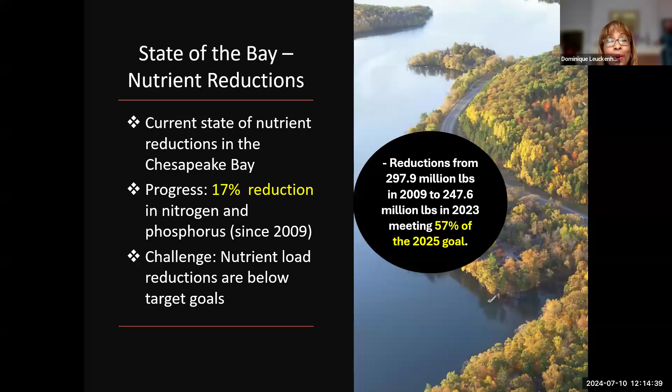And let's be reminded, 2025, well, we're almost halfway there. So we've got to look at these kinds of next generation approaches, such as what we're talking about, the use of biochar in order to improve the health. And it really amounts to healthy soil.

As indicated, we've had a lot of erosion, sedimentation with the increased intense storms. If you've got poor soil health, and we have poor soil health everywhere, in our ag lands, in our urban lands, we've essentially in ag applied lots of chemicals, and we've moved towards big outcomes in terms of product. We've destroyed the soil. And that's why, as I'm going to mention later on, USDA NRCS is now paying farmers to add that carbon back to the soil through compost, but also through biochar.

So as we look at the volumetric impacts, which are exacerbated now, USGS did a study a number of years ago and modeled to determine the impact of low impact development or green infrastructure and how it can improve performance and reduce the volumetrics, and found that it could significantly reduce those volumetrics, so this would be decentralized distributed green infrastructure versus centralized gray infrastructure, and that it would have a significant improvement.

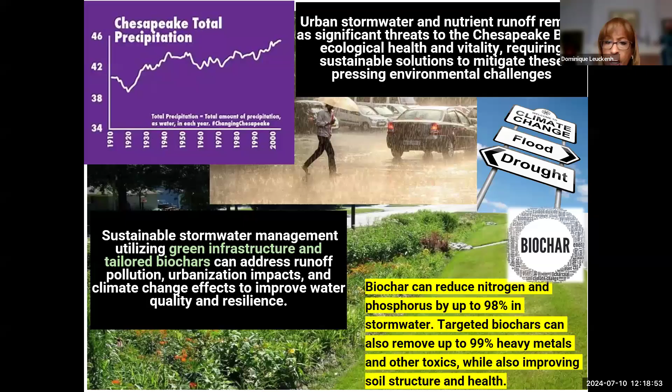Biochar has been found, and when I say biochar, I'm going to talk about a broad category of chars, because different chars, based on the biomass source, are better to treat different types of pollutants. But as a class, we've seen the ability to reduce nitrogen and phosphorus by up to 98% or so in stormwater, and heavy metals similarly, 99% or so, and also PFAS in work that I'm currently doing with Stevens Institute of Technology. In addition, with the benefits of using biochar, we're seeing opportunities for credits and subsidies. So investment in biochar can mean money back.

USDA has a code 336. It's a soil carbon amendment. They're now actually providing financial assistance, as they call it, for putting carbon back into the soil. Typically 60% biochar, 40% compost in 2023. And this is an average, because it really varies state to state. I believe at this point, just about all of the states have adopted 336, but not all of the states have implemented 336. And roughly $160 per cubic yard is reimbursed back to the farmer.

This can be used on farmlands or forested lands. So there's money back, and that carbon is helping to regenerate the viability of that soil. And also the carbon increases the soil's ability to hold water. So in a drought, very important, but later on you'll see that water also helps with denitrification and bioretention.

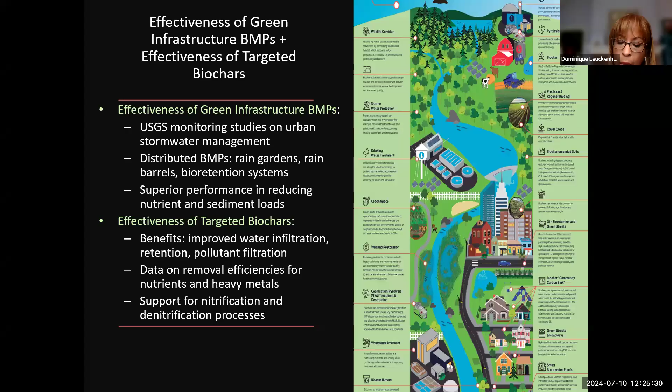So this is just a summary of some of the things that I've mentioned before, and I'll get into the improvements in terms of infiltration and pollutant treatment, removal efficiencies, including those for nutrients and heavy metals, and of course nitrification and denitrification processes, which is where biochar helps enhance microbial activity to do the job. So here's a review of some of the things I've said. I'm not going to spend a whole lot of time on this slide, but it gives you an idea of the types of functions of biochar and why it works.

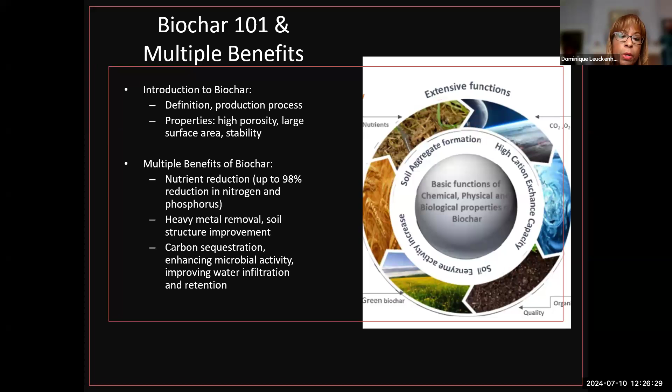So there's a physical aspect to it, a chemical aspect, and of course biological. Physical: surface area, high porosity. Chemical: cationic exchange capacity. They're mostly anionic, meaning they have a negative charge. They can be functionalized to change those charges in order to treat certain pollutants. But for example, that negative charge is what makes them so great for heavy metal removal. And the porosity is also what helps with microbial populations, so you'll get biofilm development, and with those microbial populations comes nitrification.

You can actually reduce ammonia, and then of course denitrification, as you can create anoxic, anaerobic conditions down in these biofilters, meaning lack of oxygen. Certain microbial populations that are denitrifiers can treat that. This is just a summary. For example, pH matters. A lot of science is important in this. And if I'm talking past some of you with the anaerobic and aerobic, pardon me, but it's to give you an idea that, as we look at nature-based approaches, chars can actually help enhance nature's ability to treat many of these pollutants.

And if you really think about it, over history we've essentially used soil and water to dispose of pollutants. And we came to believe dilution is the solution to pollution. Well, now we've got water bodies like the Passaic and Hackensack Rivers near our property in Newark. Both are Superfund sites now. Same thing with our soils, because the carbon and organic matter has been eroded, and while we're adding carbon back, we found we get attached pollutants to that. Biochar can help to return and regenerate those resources.

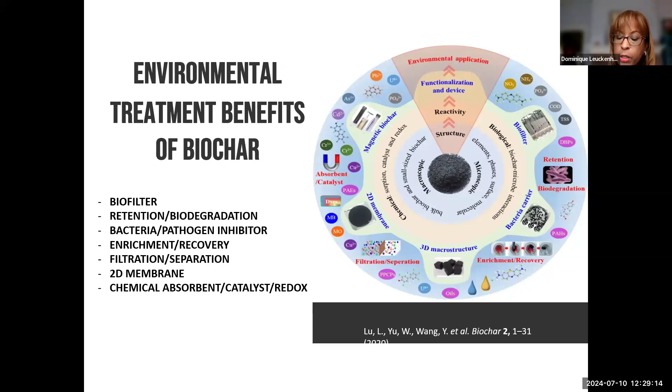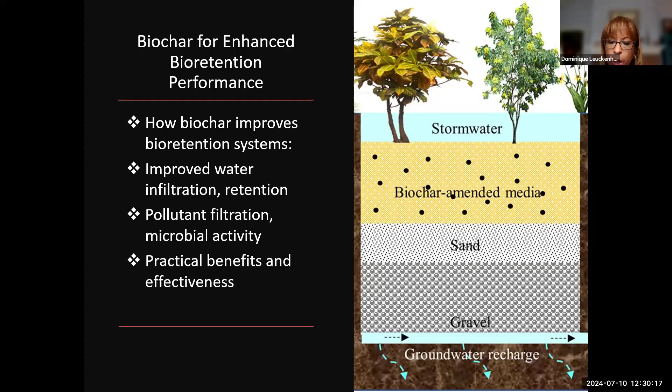The vegetation we know is important for the treatment, but typical bioretention systems have not been found to treat dissolved pollutants, which is very important in terms of really being able to improve that water quality, whereas the addition of biochars is helping to address and treat those dissolved pollutants and enhance that contaminant removal. The char serves as a carbon source as well for the microbes to do that.

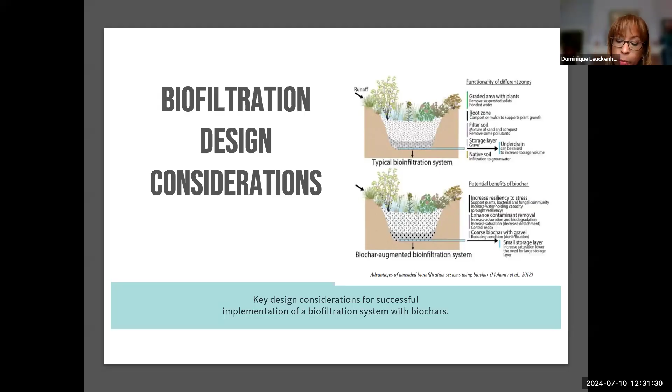In fact, biochars have been compared to granular activated carbon, which has been the treatment of choice for toxics. But granular activated carbon is made from bituminous coal or coconut at high temperature, not climate friendly, and expensive. I'm going to call the biochars sort of the greener activated carbons. And what's great about it is we're taking waste biomass and turning it into a beneficial reuse. Big deal, because waste is a big problem, and we have a lot of sources of that biomass.

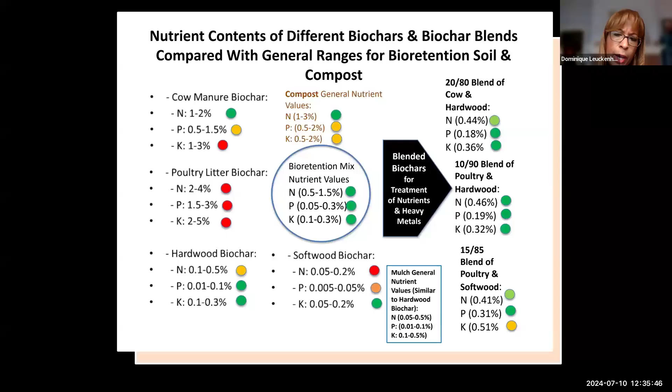You can also think about this if you're looking at trying to bring back healthy soil, for example, in a riparian corridor. But I think what I'm interested in is, how can we treat heavy metals and nutrients through these blends? And that's what we've been experimenting with.

Here's an idea of surface area. Wood chars tend to have higher surface area than manure chars. Pardon me, I'm going to call them chars. Porosity, the manure chars tend to have, interesting, it depends on the char, but if you compare the porosity, they're very similar. And of course, it also depends on the source material, both for wood and manure chars.

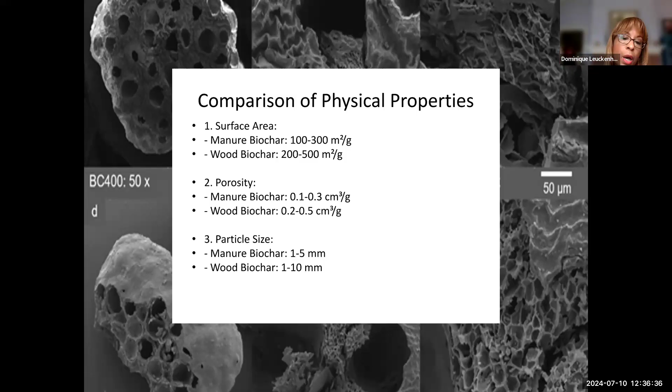Some manure chars have large pores, not as many in quantity, but in size, which is what you don't see here. Particle size, you can see wood char 1 to 10, 1 to 5. So it's just to give you an idea, comparing them.

pH levels, the manure chars tend to be higher in pH, which is why it tends to also make them better for treating, for example, lead and heavy metals. We've tended to add, for acid type soils, acid mine drainage, for example, we've tended to use lime to raise that pH. In this case, you can use a poultry char in that soil, not in the water, but in the soil, for example.

Cation exchange capacity, because manure chars, if you think about it, the source of those manures and what that animal ate, you may have more minerals. So that CEC tends to go up, which means they have a stronger binding capacity, particularly if you're trying to treat something cationic.

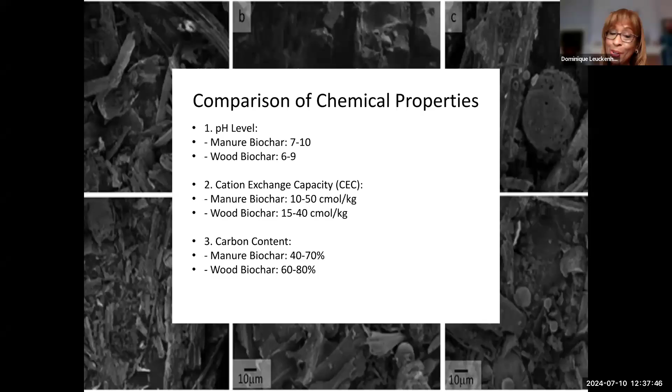And then carbon content, wood chars tend to have a greater percentage of carbon than manure chars. But again, this is very general, you really got to look at those individual chars, and that's why the science and the data is important. Water holding capacity, very similar. Again, it's the larger pores that help the manure chars. And then of course, large surface area and lower moisture content starting with wood biochar tends to really increase your water holding capacity.

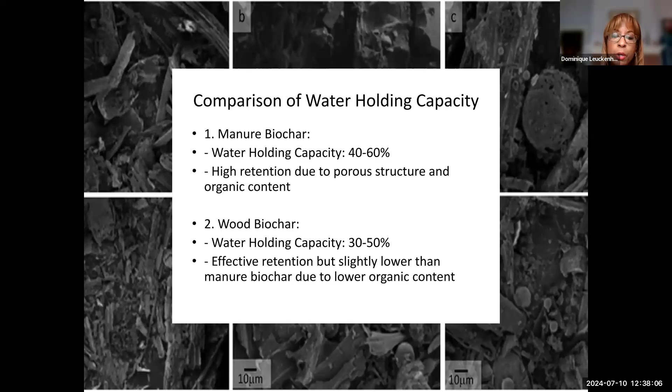So I want to move quickly through some of these studies that are being done using chars to amend green infrastructure bioretention. Shout out to Dr. Imhoff and the University of Delaware, who years ago started working on amending, in this case it was a stormwater pond, but they've done swales, and this is using wood chars, and have been able to reduce total nitrogen. Again, remember this is dissolved, up to 73%, and phosphorus 90%. So very effective, and also improving soil health.

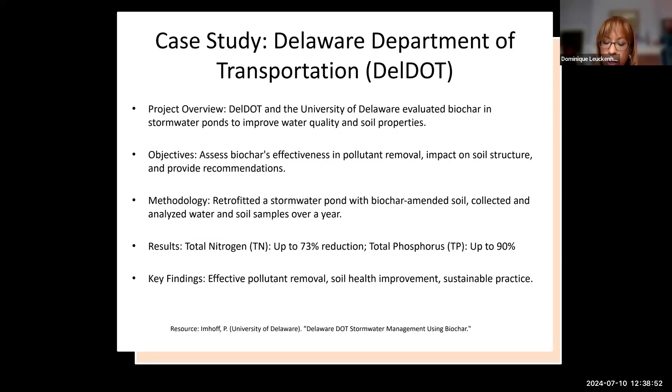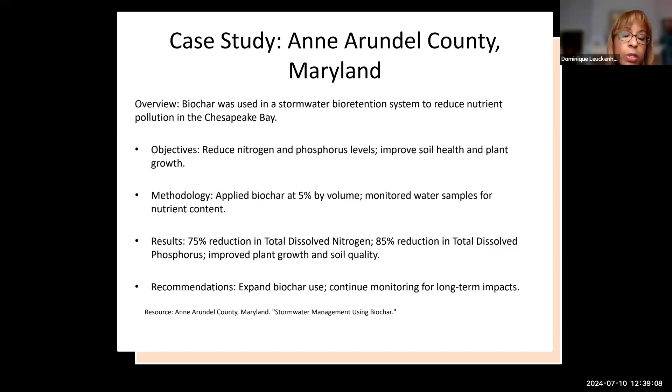Anne Arundel County, and this is roughly 5% char. It's very similar, 75% dissolved nitrogen, 85% phosphorus. Again, continued monitoring to look at the effectiveness. Philadelphia, Green City Clean Waters' use of green infrastructure to address their CSOs and beyond, have also studied the addition of char to bioretention, 5%. So you see very similar numbers. So we're seeing consistency here. Again, these are wood chars, 80% P, 70% N.

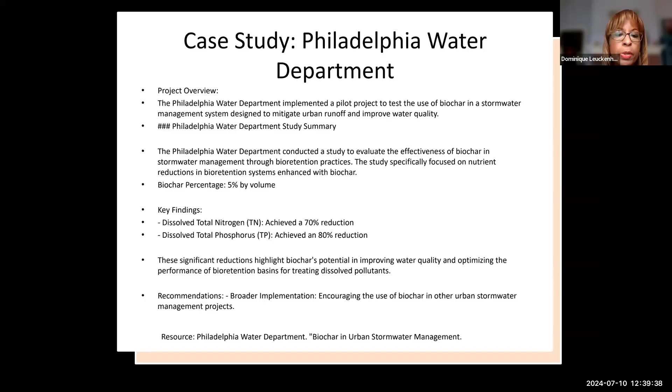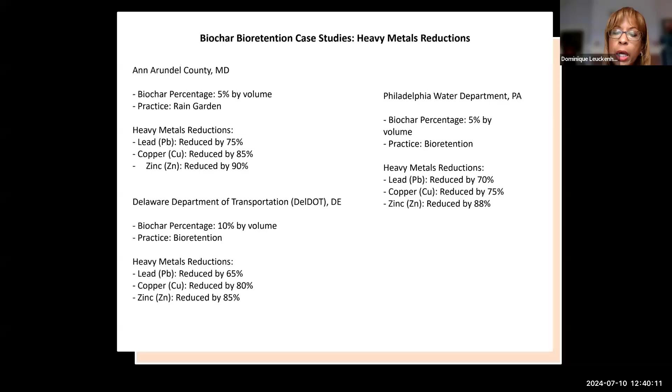And then just a summary of those in terms of what they did with heavy metals, very similar. Anne Arundel rain garden, lead 75%, copper 85%, zinc 90%. DelDOT project, this was 10% char by volume, got 65% reduction of lead, 80% reduction copper, 85% reduction zinc. And Philadelphia, 5%, got 70% reduction lead, 75% copper, 88% zinc.

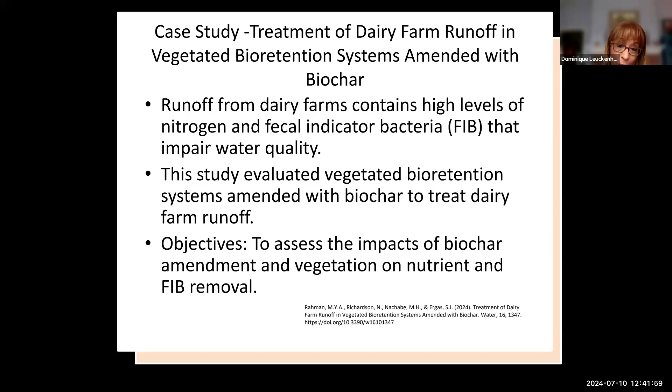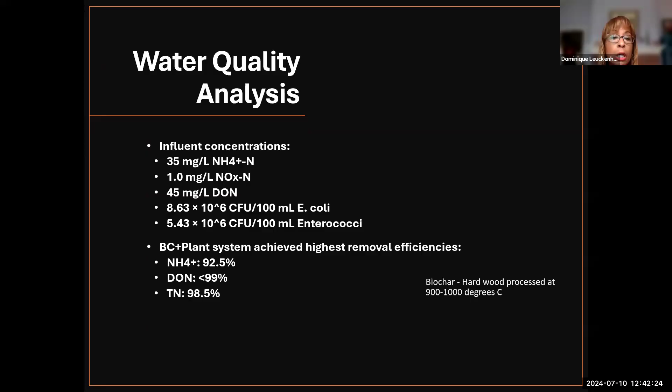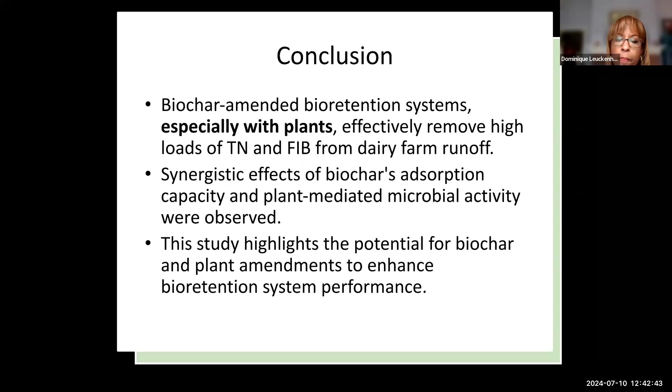So it's kind of getting back to what I was talking about at the beginning about the importance of how you bring green infrastructure together with char, and then of course the microbial activity that really helps to improve performance. So quickly, if you look, ammonia was reduced by 92.5%, and total nitrogen was 98.5%. I believe phosphorus was very similar, but significant reductions in E. coli and enterococci. So again, the multi-beneficial aspects, the biochar with the plants. So phytoremediation and microbes had synergistic effects to get the multiple types of performance reductions there.

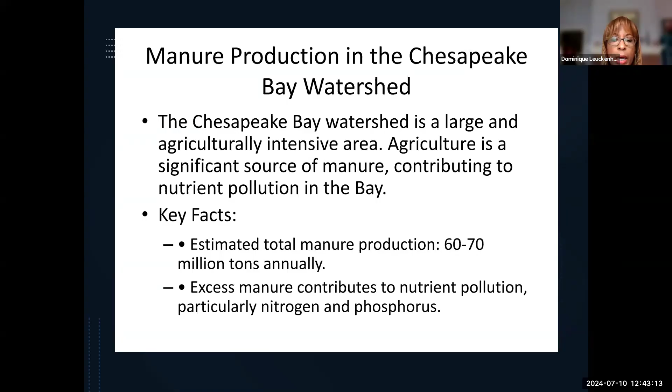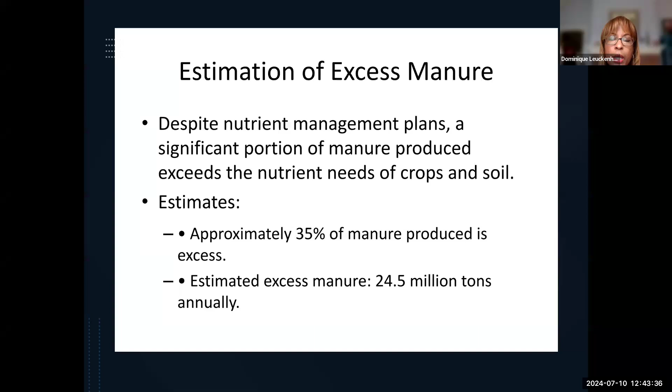So why am I talking about manure-based biochars when we see the great kinds of results with the wood-based biochars? Well, I think if we're going to be sustainable, you've got to look at the biomass that's in that region that you're trying to figure out what to do with. And in the Chesapeake Bay, estimated total manure production is 60 to 70 million tons annually. That excess manure contributes to nutrient pollution, particularly nitrogen and phosphorus. And despite having implemented lots of nutrient management plans, there's still a significant portion of manure produced that exceeds the nutrient needs of crops and soil. In fact, about 35% of the manure produced is excess. That amounts to 24.5 million tons annually.

Just comparatively, whether you're looking at a gasifier or a pyrolysis unit, and we've got a lot of activity now because of interest in biosolids and sludge and PFAS, and EPA has actually determined that pyrolysis gasification at temperatures of 600 Celsius and above, 600 to 800, can destroy PFAS. Well, let's look at this. In 5 years, this is sort of a general range, 25 gasifiers can process 1.8 million tons of excess manure for about 70 to 80 million dollars. According to the Chesapeake Bay program, about 283 million pounds or 141,500 tons have been removed in the past 10 years for a cost of $5.8 billion. So let's do the math.

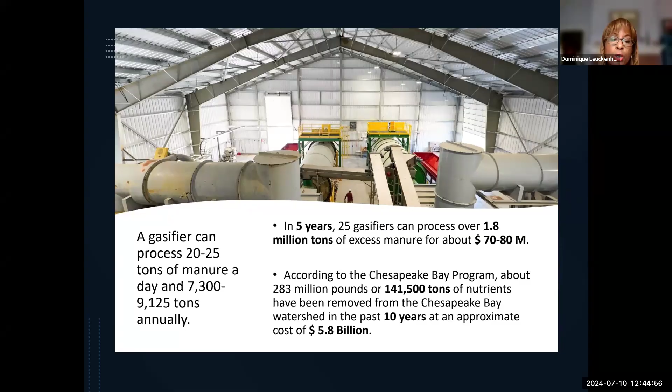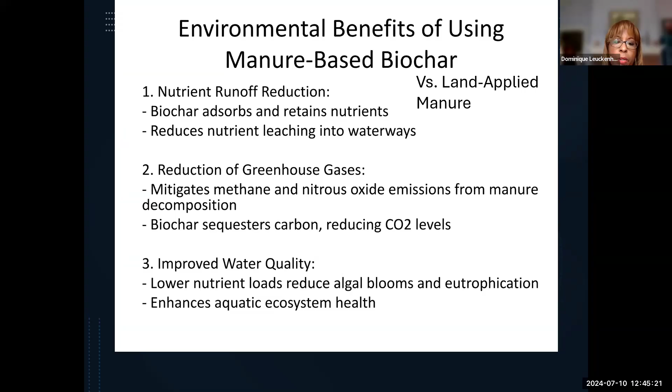Maybe we need to revisit some of this processing, and whether you're putting it back in the soil, like Cornell found that biochar from dairy cow manure reintroduced to the soil was more effective in soil health and regeneration than manure land application. And also you're reducing greenhouse gases, you're mitigating methane, which we know is an acute gas, nitrous oxide emissions, and of course, importantly, sequestering CO2, and reducing that runoff helps to reduce algal blooms, etc.

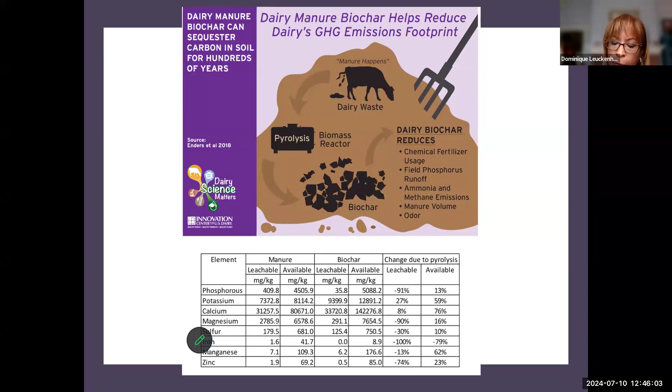Shout out to Cornell and Akio Enders. This is Akio's slide that I borrowed that actually shows from their study that for cow manure char, in terms of leachable, it's not leachable, minus 91%. There's 13% of availables, predominantly bioavailable. You can see some of the other elements in there and why we've also seen cow manure biochars behave very well in terms of treating heavy metals.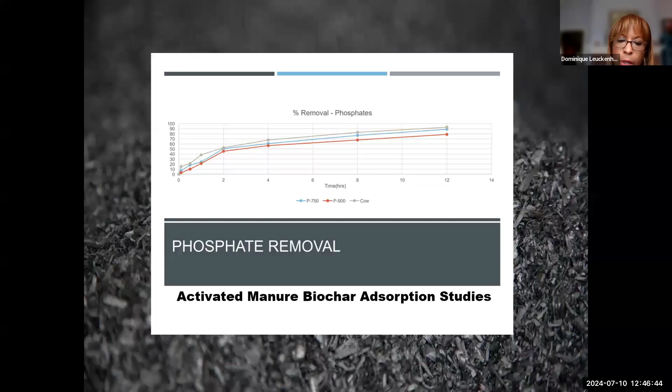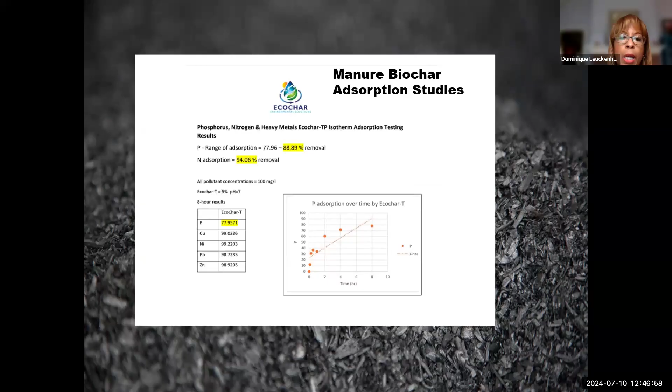This is from some of my own studies with Stevens Institute of Technology's Environmental Engineering Lab, where we activated certain manure chars and were able to get really great performance, this is cow, in terms of nitrogen removal. You can see that it's in the upper 80s, 90s percentage, and these were at different temperatures, 750 and 900. Phosphorus removal, again, we can avoid the leachate and actually get adsorption. More manure biochar studies. This one was a different one. It was again activated, 88.9 for P, 94 for N. Similar, and these are hydraulic studies. We also did the flow rates, 110 to 118 inches per hour. So very good flow rate.

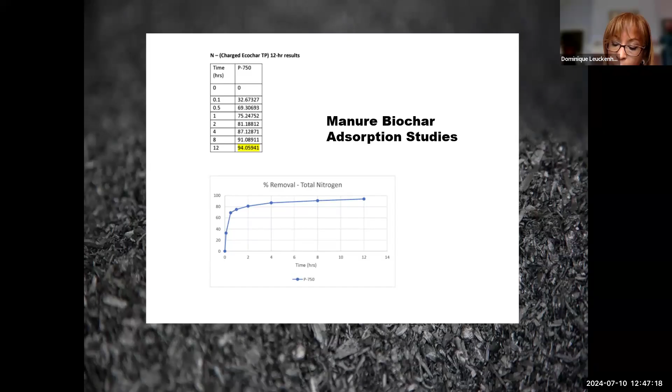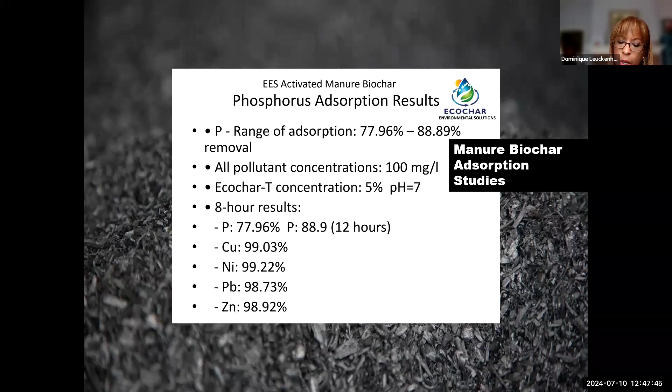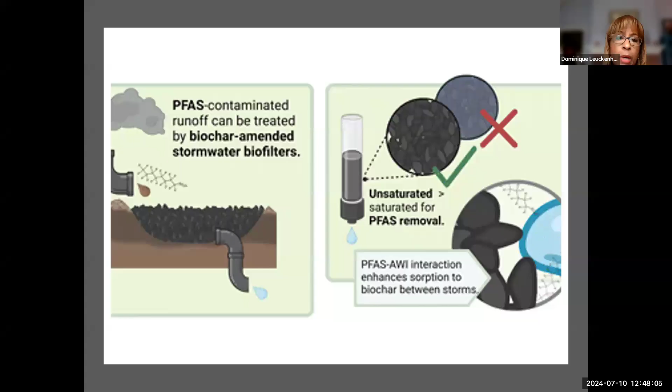And this is just a summary of where we have concerns for heavy metals as well as nutrients, why we might want to look at those amendments with these manure chars, because as compared to the heavy metals removals that I shared from the wood chars earlier, these manure-based chars get into the 99% removal of those heavy metals. And we're also seeing very similar results in treating PFAS, where these manure-based chars outperform the wood-based chars. Both worked, but wood we saw in the 95%, these activated manures we saw in the 99.8% removal. And we're finding other beneficial uses for those greenhouse gas emitting biomass sources.

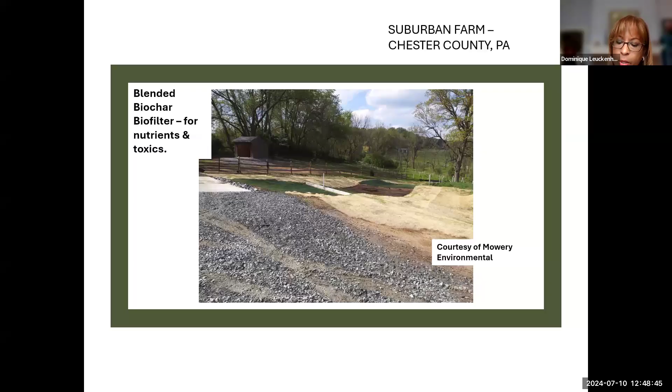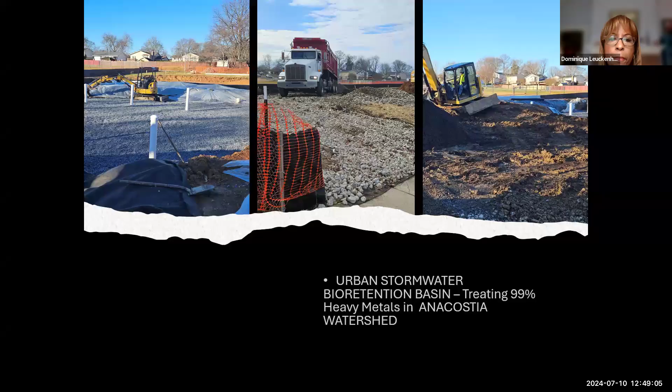So now, just to quickly talk about the Bay workshop, using carbon to achieve Chesapeake Bay and watershed water quality goals and climate resiliency. The workshop was done last summer, early summer. It identified the science gaps in implementation activities and opportunities. And it was really about, how do we integrate biochars into the Chesapeake Bay TMDL watershed model to improve the state of the Bay. And in order to do that, leverage biochar credits in these BMP protocols.

So the discussions focused on climate smart agriculture and forestry. Again, as I mentioned, the 336 from NRCS, that's paying farmers to put carbon back in the soil. Urban landscapes, which still need carbon, but also need a treatment for these legacy and emerging toxics. Also, if you're planting riparian corridors, there's nothing like the char. You put the carbon back in, you create a carbon sink, you reduce greenhouse gases, you increase the ability to reduce volumetric flows, you help support the health of these water bodies and the bay system.

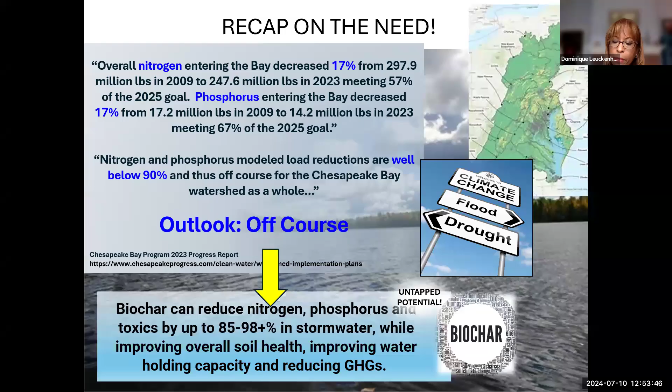Just in summary, as the workshop presented, there were over 30,000 peer-reviewed scientific papers on biochars that have been done in the past 10 years. We agreed, hey, look, in many areas, we already know enough. We need to go ahead and move on this. Quite frankly, in the stormwater arena, many of the practices that we've had out there, we don't even know if they really worked. And as I mentioned with stormwater ponds, they are now sources of toxic pollution. We know this can help.

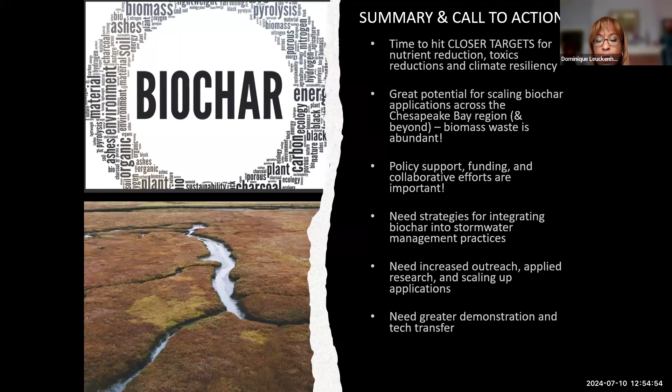So there's great potential for scaling biochar. Biomass waste is abundant. We need the policy support, the funding. We need to work collaboratively. We need strategies on integrating biochar into stormwater management practices, but it was good to see that it's already happening on its own because it makes sense. And we need to increase outreach and, of course, applied R&D, scale up on those demonstrations. And that's it. Thank you.